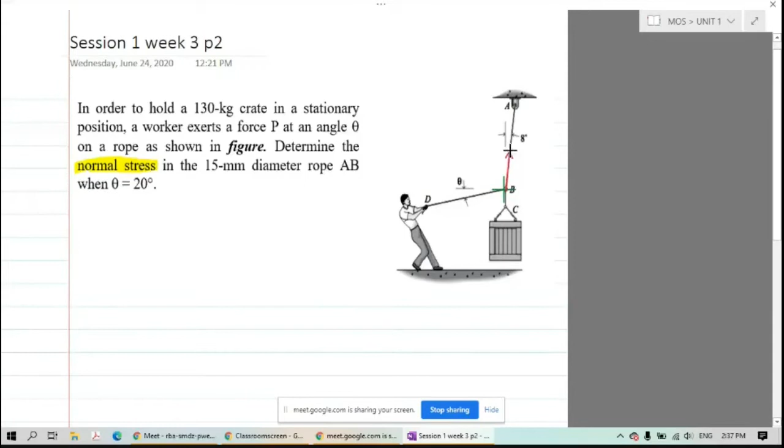For this, let us consider, so I'll put a small plus sign here. This sign indicates how the force will be acting. So if I consider a force here, one force will be like this, another will be like this, and the third one will be like this. Okay, so you have three forces. You have to identify what those forces are, and find out their values.

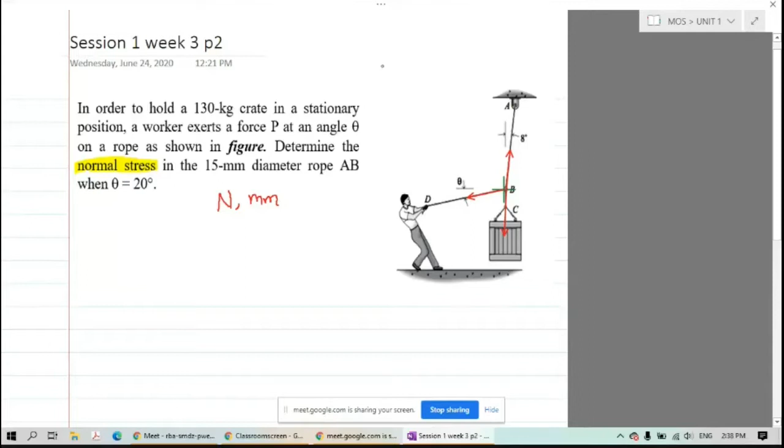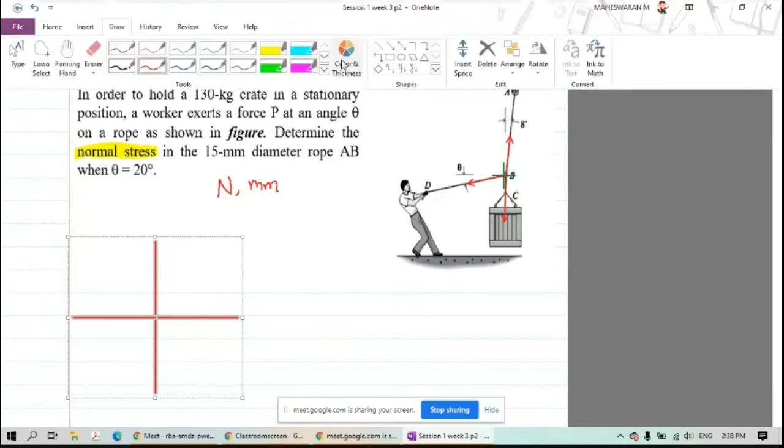So again, for this problem also, I am going to use Newton and mm to solve this problem, right? I'll draw a free body diagram. As in engineering mechanics, we are going to follow the same. I'm going to put a plus sign here. So you have forces. Let me consider you have a force here. You have another force acting like this. And a third force vertically downward, right? So these are the three forces you are having.

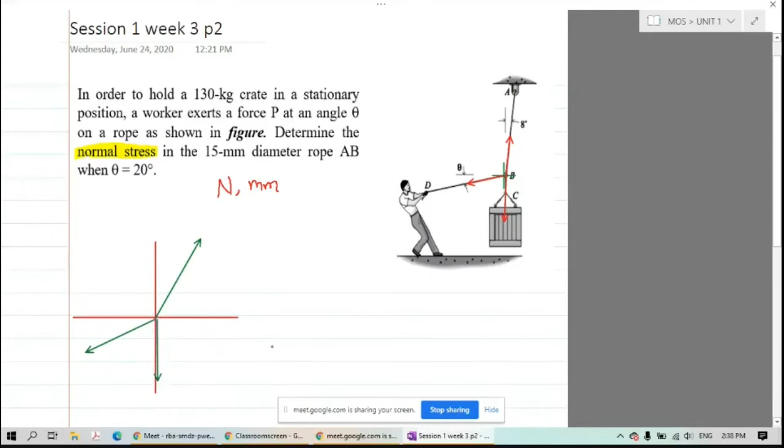Now I'm going to identify the forces, that is tension. So you can see here, this one will be TBA. We call this TBA, tension along the rope B to A. And this one is TBD, tension along the rope B to D. And this is weight. Weight is 130. So can you tell me 130 into 9.81? What is the value? 1275.3 Newton. Very good. Thank you.

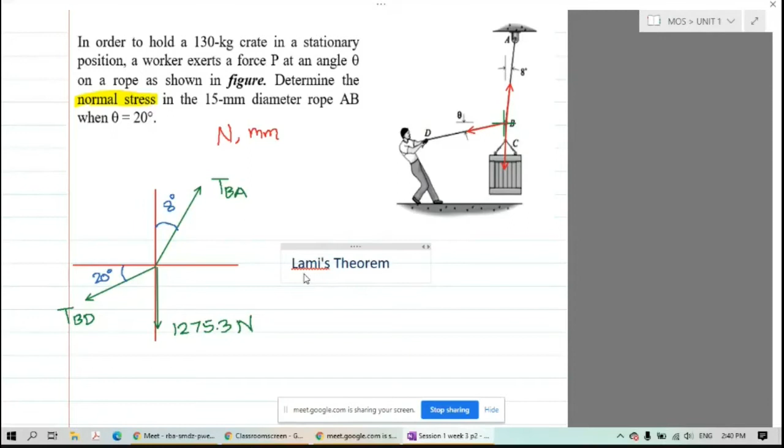So these are my forces. And if I consider the angle, this angle is 8 degrees. And theta is given as 20 degrees. So we have to identify their values. You have three forces. So what will we use here? Can anyone guess? Three forces. So we go for Lami's theorem. According to Lami's theorem, we know the formula.

What is that formula? Force by sine of the opposite angle, so TBA divided by sine of the opposite angle. What is my opposite for this? This angle, right? This is the angle opposite to the force, between the other two forces. In total it is 90. 90, 20 has gone, remaining will be 70. So this will be sine 70, is equal to TBD by sine of its opposite.

What are my opposite angles? My opposite angles are here, this one and this one, right? This one is 82 degrees, plus 90 degrees. So what is the total? 172. So the total is 172 degrees, right?

So the next one is 1275.3 divided by sine of its opposite angle. My opposite angle is 20 plus 90 plus 8. So 28 plus 90, how much will it be? 118 degrees. So this is what we are going to use. But my aim is not to identify all the forces. It is not engineering mechanics.

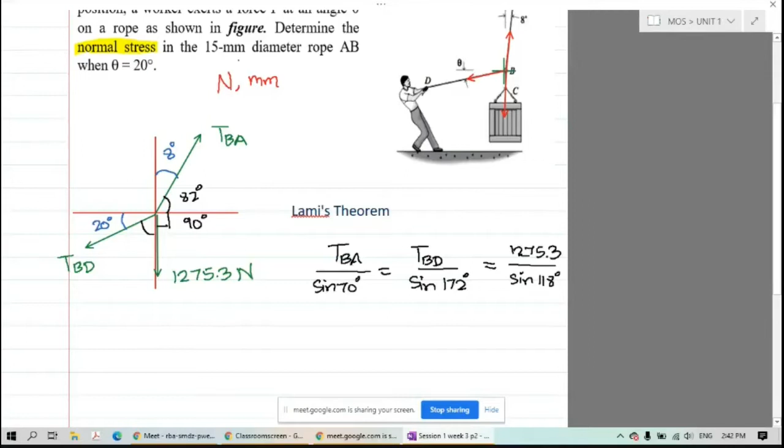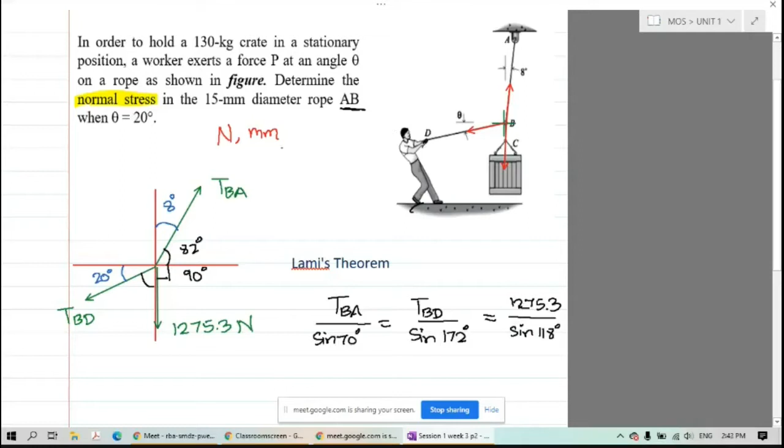My aim is to identify the stress developed in rope AB alone. Which means I have to concentrate on identifying the value for AB alone. So don't consider BD and all, that is not required, right? We have just drawn it for calculation and understanding, but our aim is to find only AB. So my equation will be TBA divided by sine 70 is equal to 1275.3 divided by sine 118 degrees.

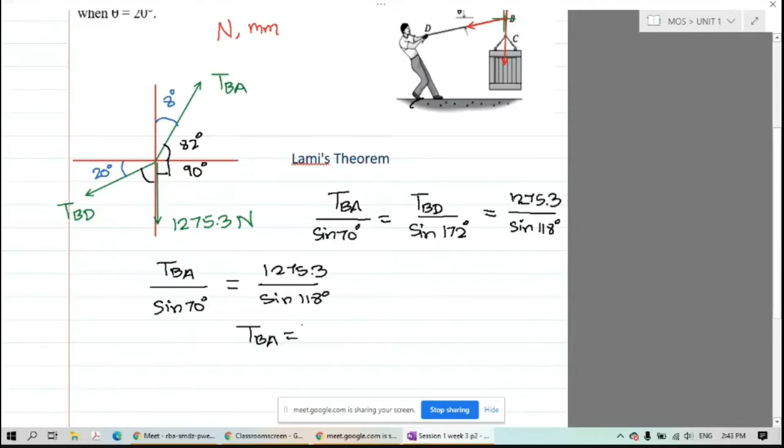So I'm not going to use the other part. Let us identify my tension, right? What is my TBA? TBA will be 1275.3 divided by sine 118 degrees into sine 70. So what is my TBA? 1357.2 Newton, right? Very good. Thank you. So now we have identified my force.

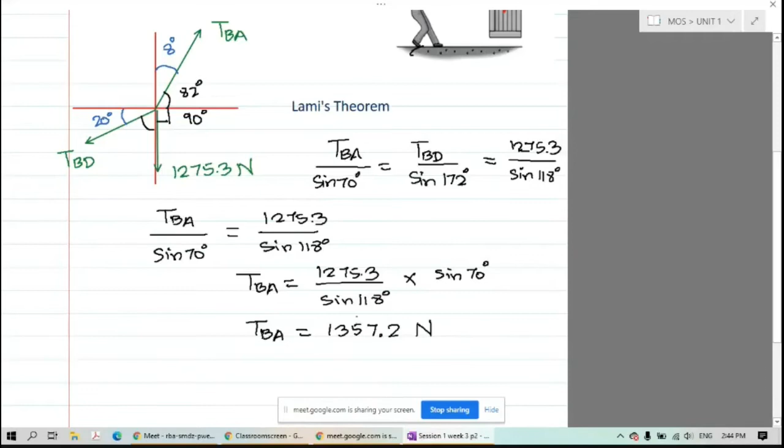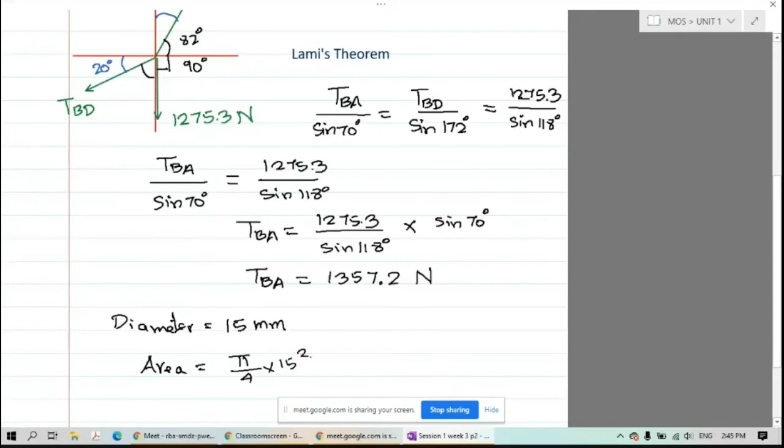Force is identified. For the formula I need stress, and you know the diameter of my rope. The diameter is given, it is 15 mm, right? Which means my area is pi by 4 into 15 squared. So we have to identify the cross-sectional area.

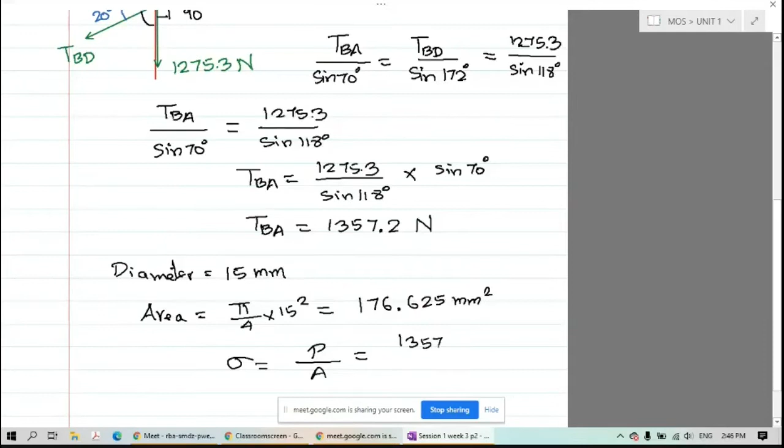176.625 mm square, right? So we identify what is my force and what is my cross section area. So the next step is my stress. Stress is force by area. So P, what you indicate here is TBA, right? Don't get confused. So which is equal to 1357.2 divided by 176.62. So 7.68 Newton per mm square.

So let me consider you have a handbrake shown in the figure. So you are applying a force, actually a uniform load, which is converted as a single point load. But it is around 70 Newton, right? So when you apply a force of 70 Newton, there will be a tension which is produced on your brake wire. So the question is, what will be the stress and what will be the strain on the particular brake wire?

So they also mention a few data. They mention what is the length of your brake wire or brake cable, what is the cross section area, and what will be the elongation after you apply a brake. First, we will consider the given data. So you have force P, which is 70 Newton. And they also give the length of your brake cable. So length L is around 460 mm.

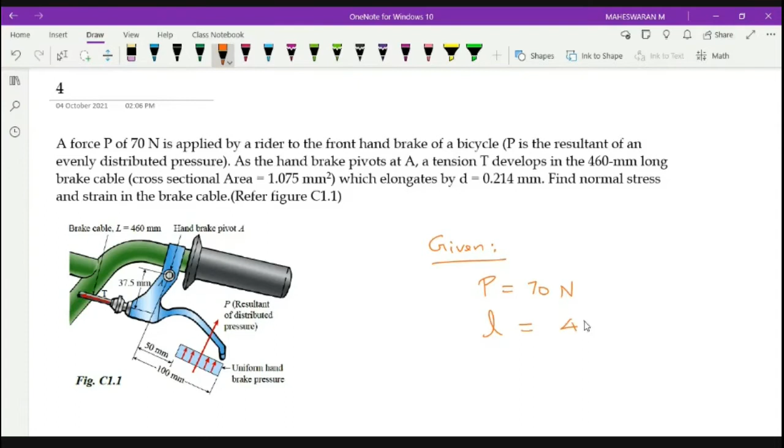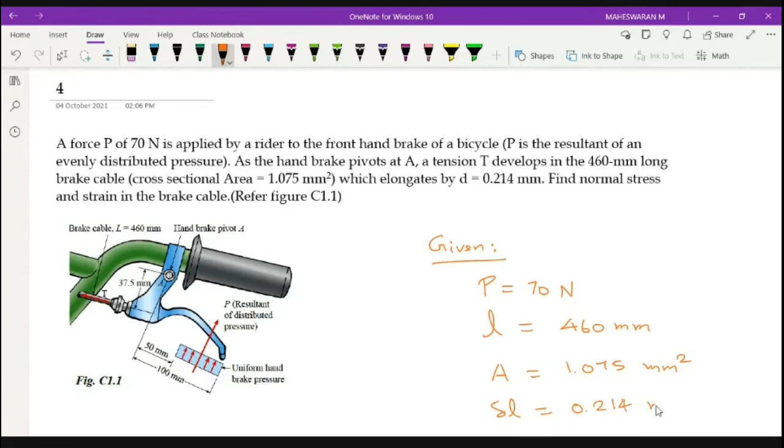Then cross section area. So cross section area A is equal to 1.075 mm square. And the elongation. So after you apply brake, there will be a small elongation, del L, which is mentioned as 0.214 mm. So they are asking two things: what is your stress and what is your strain?

So the first step is let us identify strain, because we know all the data related to strain. Strain is change in length by original length. Change in length is directly given, which is 0.214, divided by original length, the length of the cable, which is 460 mm. So if you substitute these values, 0.214 divided by 460 gives 4.65 into 10 power minus 4. Very good. So we got this as a strain, right?

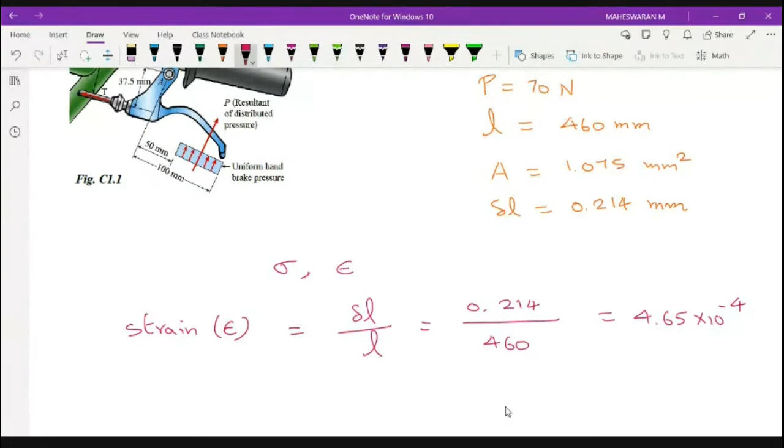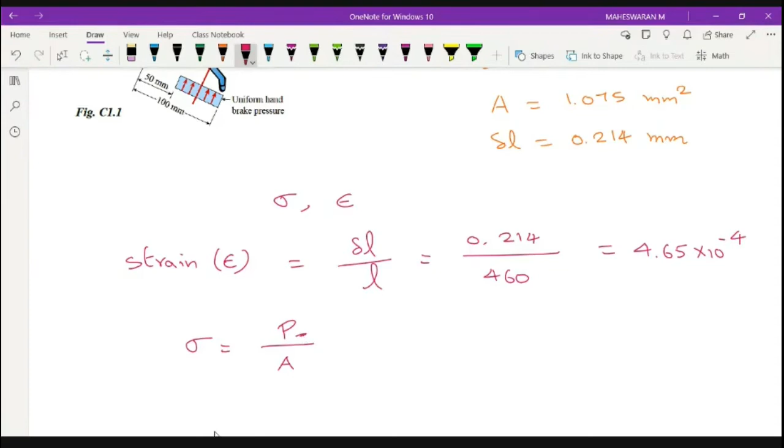So the next step is I have to identify what is the stress. To identify stress, my formula is force by cross-sectional area. I know cross-sectional area, which is 1.075, but I have to identify what is my force. So that deals with this picture. Consider this as an engineering mechanics problem. We have to identify what is the tension T, which is acting here.

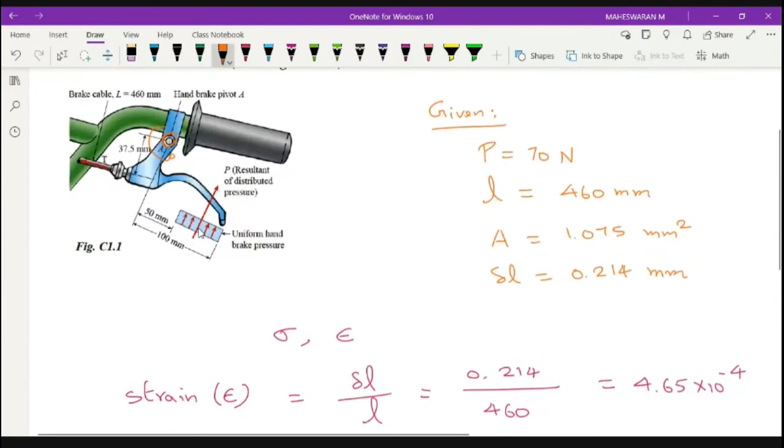So when you apply a force, you can see that this point A will have rotation, which is moment. So in order to avoid moment, you will have a reaction force. So let me say moment at A is equal to 0. You know the formula for moment: moment is force into perpendicular distance.

So what are the forces you have? You have two forces. One is P, which is here. This is my force P, and the perpendicular distance with respect to that: this is 100, this is 50, so the remaining will be 50, and at the center this is 25. So the perpendicular distance from point A to your force is 50 plus 25, 75. It is rotating in anti-clockwise. So P into 75, force into perpendicular distance.

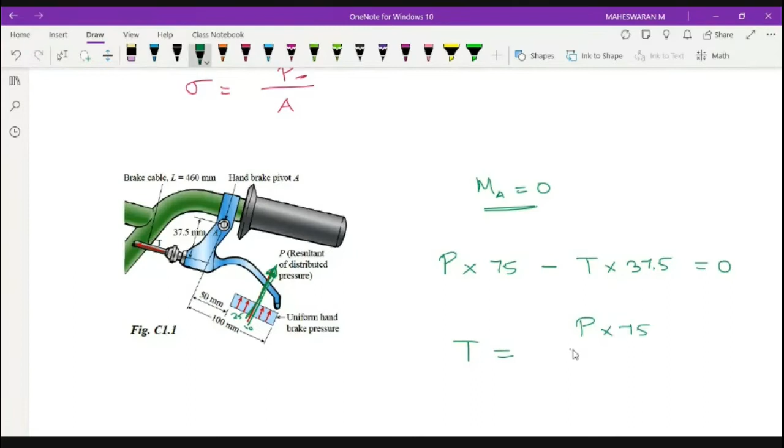Similarly, let me consider this one. This is rotating in clockwise. This is my T force, the tension. This tension has a perpendicular distance of 37.5, which is minus T into 37.5. Why negative? Because it is rotating in clockwise. So this is equal to 0. My aim is to identify T. So T is equal to P into 75 divided by 37.5. So what is the value of P?

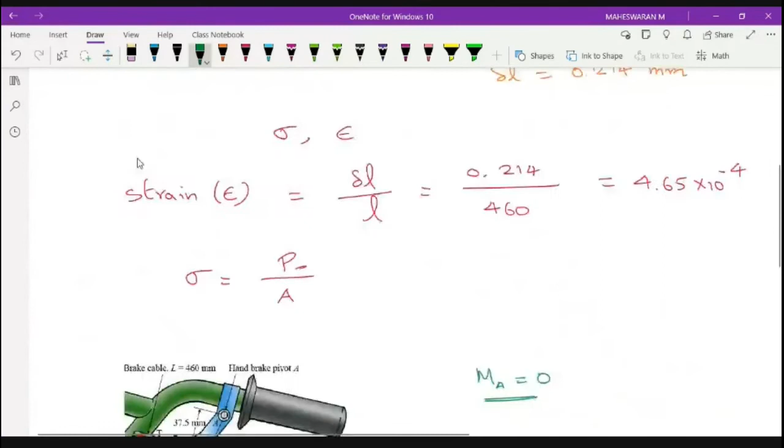So P is already given. So T is equal to P. So overall force P is 70. So T is equal to 70 into 75 divided by 37.5. What is the value of T? Your T is 140 Newton.

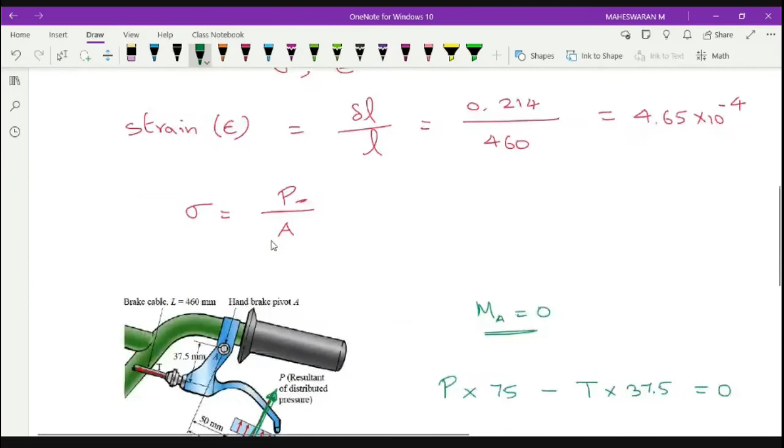So now your T is nothing but your force in this case, right? So let me take this thing again, this is my value which I am going to put here. So my stress is equal to force, which is 140 divided by cross section area.

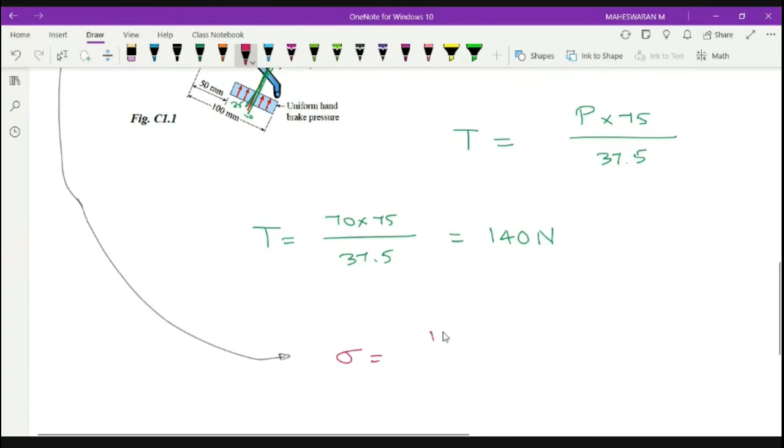What is my cross section area? 1.075. So this is stress: 140 divided by 1.075. So you are getting around 130.23 Newton per mm square.

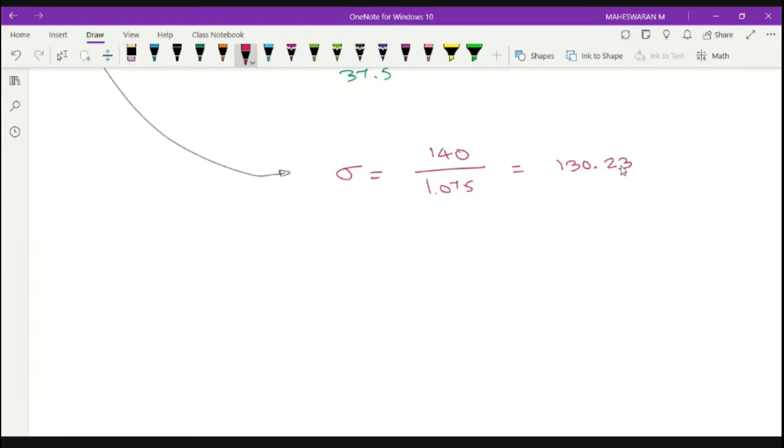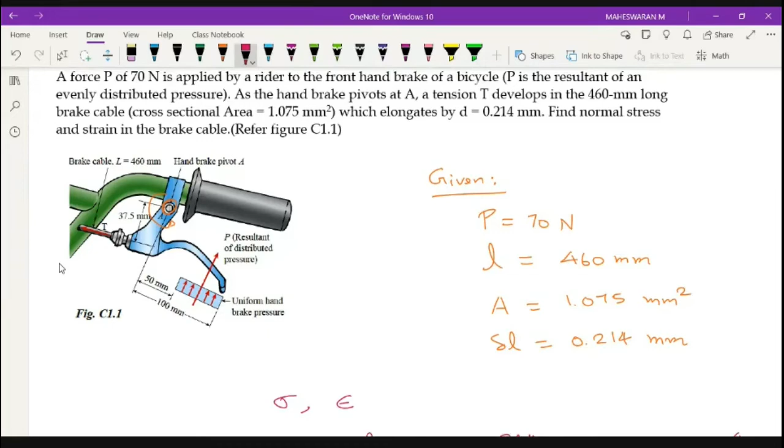Why we are identifying the stress? What is the purpose? What is the necessity of identifying the stress in the cable? So this cable may be a particular material. Let me consider it is having a mild steel, or some material, so let me call this as a mild steel.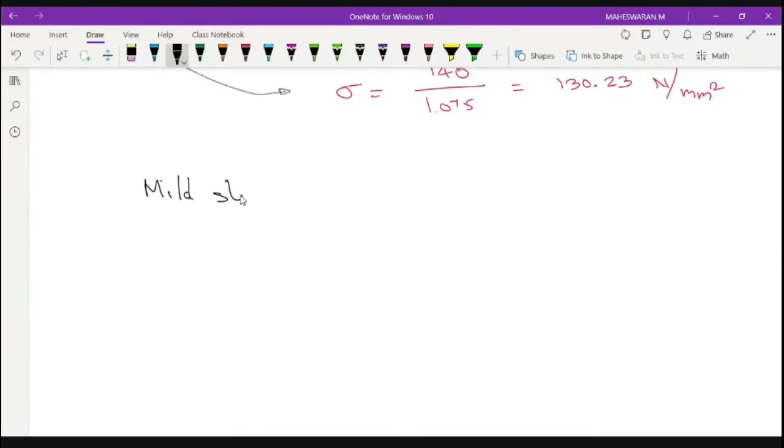So your cable is mild steel. So the mild steel, what is the yield strength, which is the maximum strength still elongation, still avoiding the elasticity. So up to elasticity limit is yield strength. So your yield strength, let me consider, it will be around 1 into 10 power 5 Newton per millimeter square. This is my yield strength.

Usually it is around 1 or 2, so it relates on particular value. Other than this, this is the maximum value, which means your stress should not exceed this 1 into 10 power 5. But what we have is very, very less, it is 130. Only if it crosses this 1 into 10 power 5 will your brake cable fail. So in this particular case, it won't fail, it will withstand.

But there are some other cases like fatigue failure. If I consider fatigue failure, I have to divide it by 8 or 10, I have to reduce it a lot. So what is fatigue? Fatigue is you are applying and releasing the load again and again. It's a continuous process. So brake, what we'll do, at least in a month will be applied around 1000 or

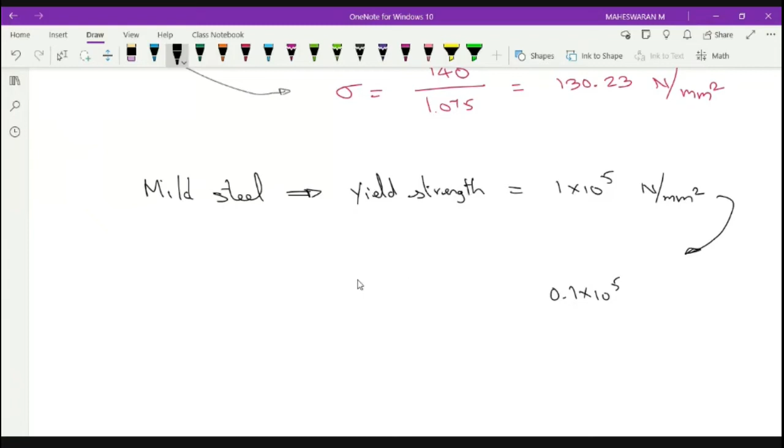So we are not considering what is the environmental condition. In cold season it will be different, hot season it will be different. We are not considering how much force you are applying, whether it is an impact force or a gradual load. When you apply a brake, you can apply it suddenly or gradually, so this also has a major cost. Then what is the amount of time you are applying it? So all these things come into picture, so it is always related to that.

So that is the purpose of this stress. This is also another problem, you can see here. You have a car, a winch car, something like that, which is around 130 kilonewton. So when it is fully loaded and slowly connected to a cable, it is moving towards upward direction. The angle is given, which is 30 degree, and the cross section of the cable is also given, it is around 490 square. The question is, they are asking what will be the tensile stress in the cable. It's a combination of your mechanics problem and your strength of materials problem, something related to that.

First, what do I do? I have to draw a free body diagram, it is similar to your engineering mechanics, as I told you. So this is my winch, my winch is like this.

Okay, this winch is having a cable tensile force T at 30 degree, weight W, which is acting downwards, right? Weight is around 130 kilonewton. And you have two wheels, right? So one wheel and two wheels.

So you know that your reaction of this wheel will be always perpendicular to your connection, so which means here you have one reaction, here also you have one reaction. We consider R1 and R2. And this two is also at an angle of 30 degree, right? This is my free body diagram.

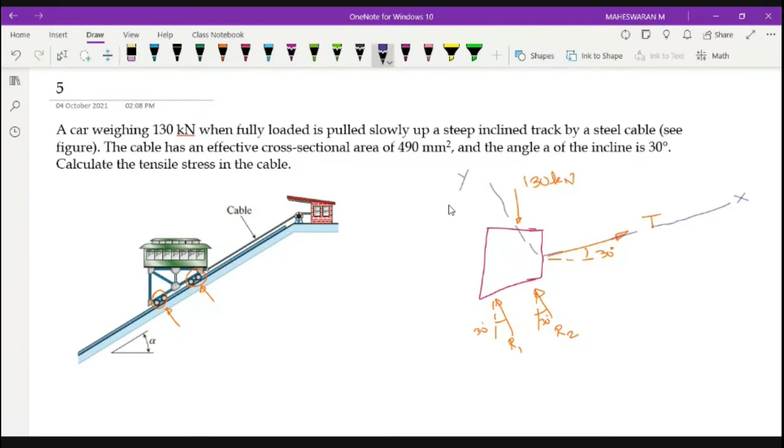Okay, so to solve this easily, what I can do, I have to change my X and Y axes, right? So what I can do, I can consider this as my X axis and perpendicular to that as my Y axis. Okay, so what happens when you do it like that? So you can easily locate. So you have only 130 kilonewton as an inclined force. Others will be straight forces. So in that case, let me draw how the diagram will be.

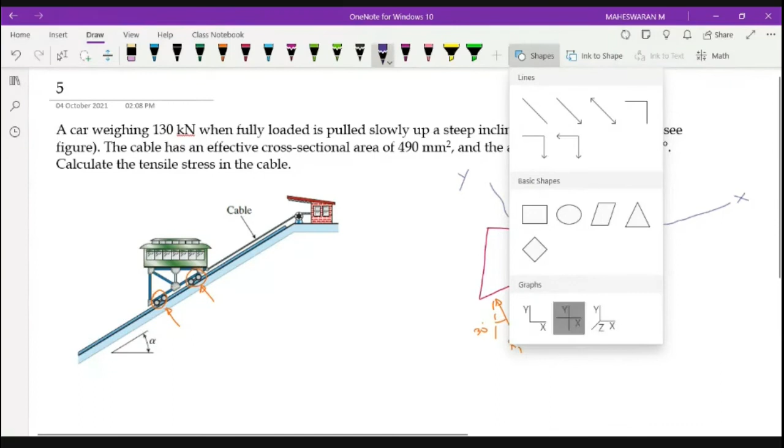So let me put a plus sign here, right? So what will happen? Your T is along x-axis. So this is my T, right? This is along x-axis T.

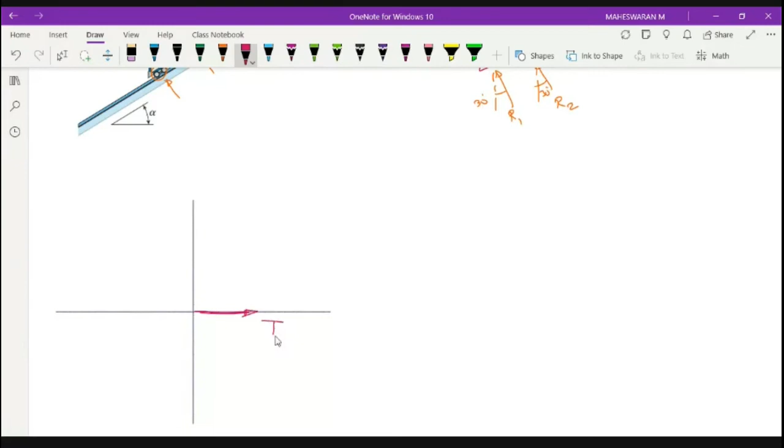Next, 130. So look at 130. So how it is? So which quadrant is your 130? Can you tell me which quadrant is your 130? So it is at the third quadrant. This is at the third quadrant. This is my 130, okay, this 130 kilonewton. Angle is vertical, so which means this is 30 degree.

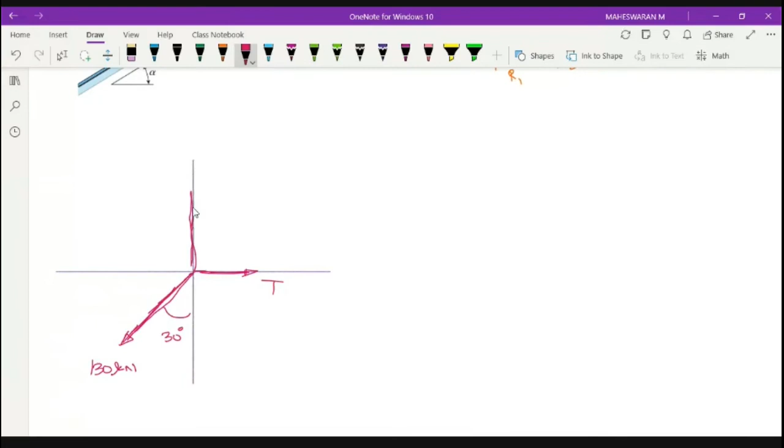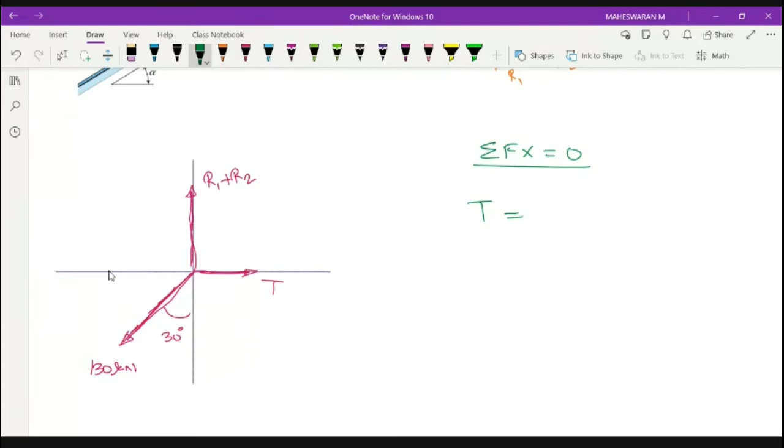Okay, to identify tension value, I can directly go for sigma fx is equal to 0. We put sigma fx is equal to 0, which means T is equal to 130. So when you bring it on this side, it will be sine 30, right? So 130 sine 30, so 130 into 10 power 3, converting this kilonewton into sine 30, right? So what you'll get? So what is my value of T? 65, so 65 into 10 power 3 Newton.

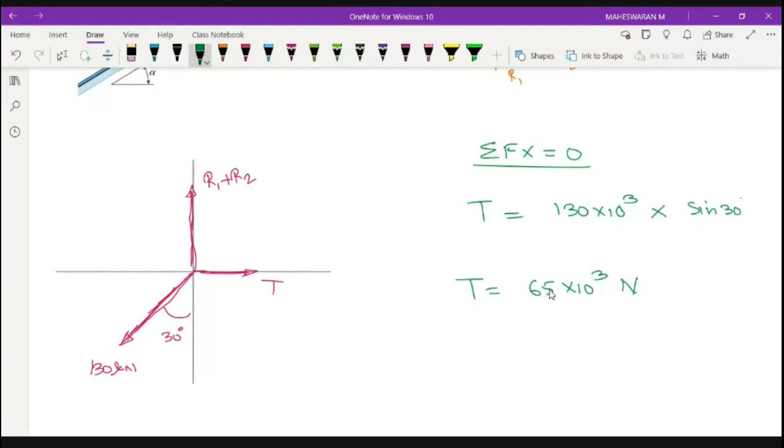This is my tensile force. Other things no need to worry. So I got my tensile force, right? So tension. So now we can identify what is the stress. Stress is force by area. Area is 490, which is given. So we can identify the stress.

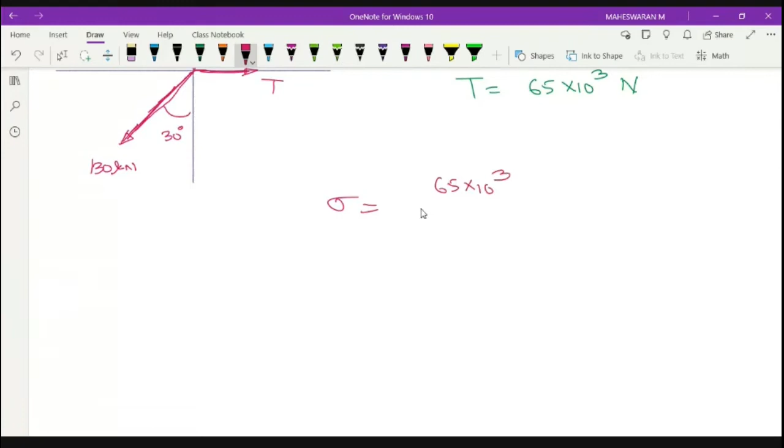Stress is equal to 65 into 10 power 3 divided by area. So what is my area? Area is 490 mm square. So what is the value of my stress? We are getting 132.65 Newton per mm square.

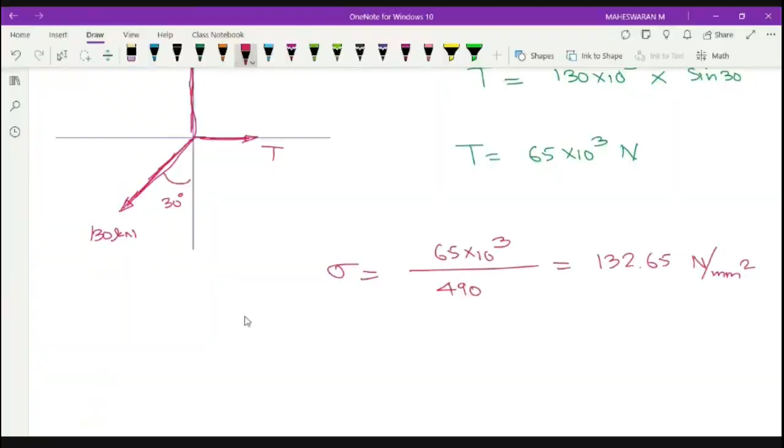Any doubt on this? This is a problem which is having you have two different types of shoes. So one man is wearing a shoe, another one, a woman is wearing a heel shoe. So you have to identify which is having more stress. So that's what the statement is. So I don't want to explain the full statement, it is clear. So the weight of a man and woman both are 80 kg, let me consider. In that case, you have to identify what is the stress developed in the shoe and who will have more pain in their leg.

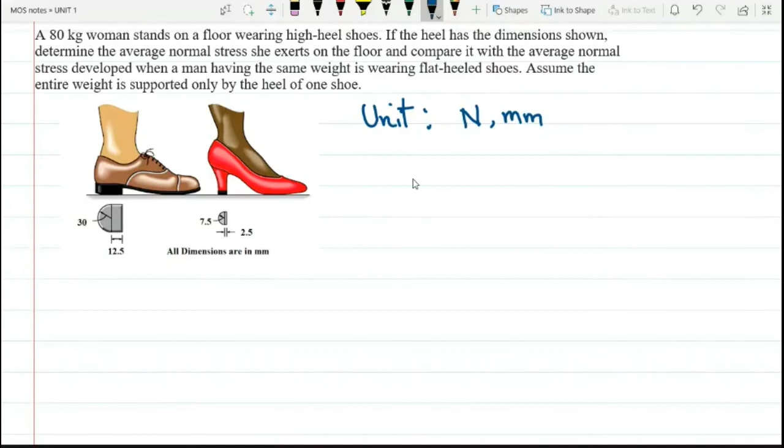First step is I'm going to use particular unit for this. So unit is very, very important. So my unit for solving this problem is Newton and mm. So I use Newton as my unit, so for any forces, I will convert it to Newton. The other one is for distances, I will use mm. So now, what are my given data?

So my given data, you have only a diagram related to different types of shoes, all measurements in mm. Another given data is the weight, which is 80 kilogram. So my given data is W, which is equal to 80 into 9.81.

So that will give you your value. What will be the value? 784.8 Newton. Okay, good. Thank you.

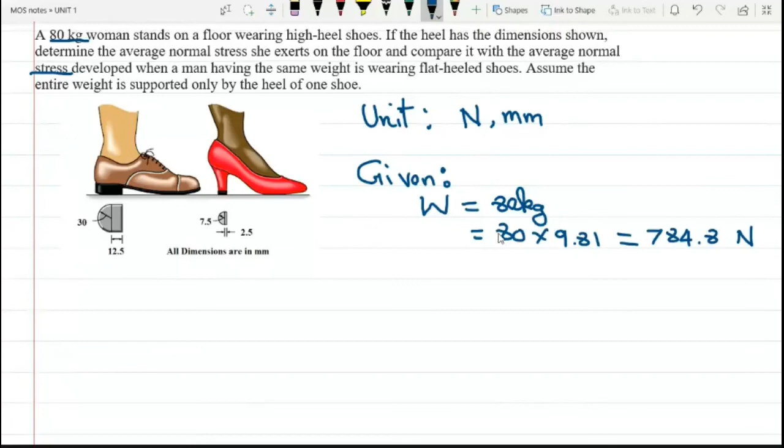So we identified what is our W, that is my force. So we know the force. Only thing is I have to identify what is the area. So our aim is to identify only the stress value developed. In that case, force by cross-sectional area will be my stress. We can directly identify it, so we will solve one by one.

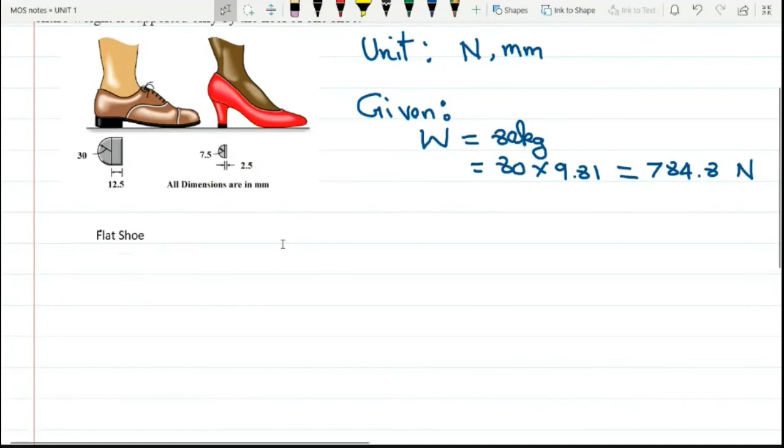First, let me go for the flat shoe, which is a man's shoe. So this is my cross section, having 12.5 as the width here. And this is the radius, so radius is 30.

So what will be the total distance? It's like a diameter, right? One radius plus one more, which is 60. So this will be 60. And of course this is the radius, which is 30. So R is 30 here.

So now I will consider this as two parts, section 1 and section 2. I want to identify the area for each section separately and add it, that will be my total area. Area for section 1: it's a rectangle, which is 12.5 into 60. So total, it will be 750 mm square.

Next, I am going to identify the area for section 2. It is a semicircle. If it is a semicircle, you know that it is pi r square by 2. R is 30, so 30 square. So the answer is 450 pi mm square.

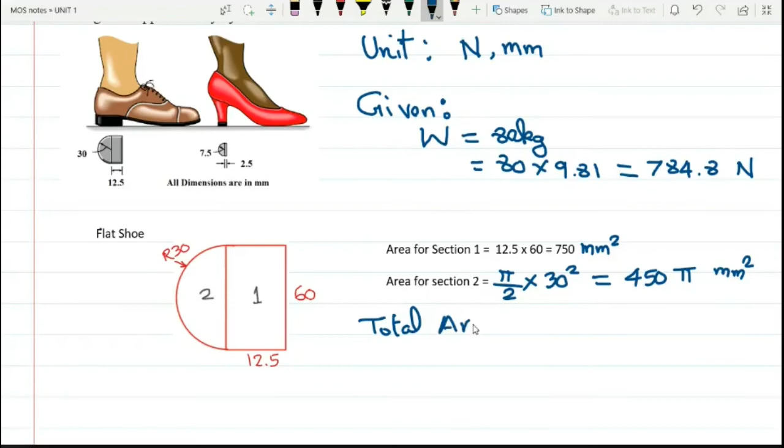So total area is the addition of these two, which is 750 plus 450 into 3.14, giving pi. So what will be the total area? 2163 mm square.

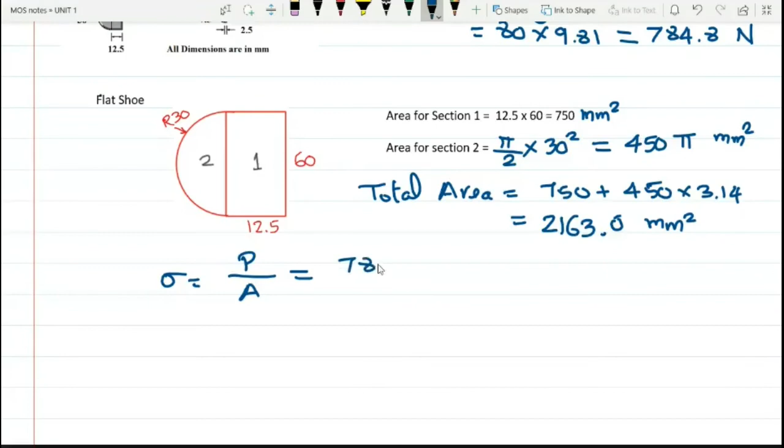So now we identified the total area here. Only thing is I have to identify stress. Stress is force by area, so force is 784.8 divided by area, which is 2163. So what will be my stress value? 0.36 Newton per mm square. This is my answer for my first flat shoe.

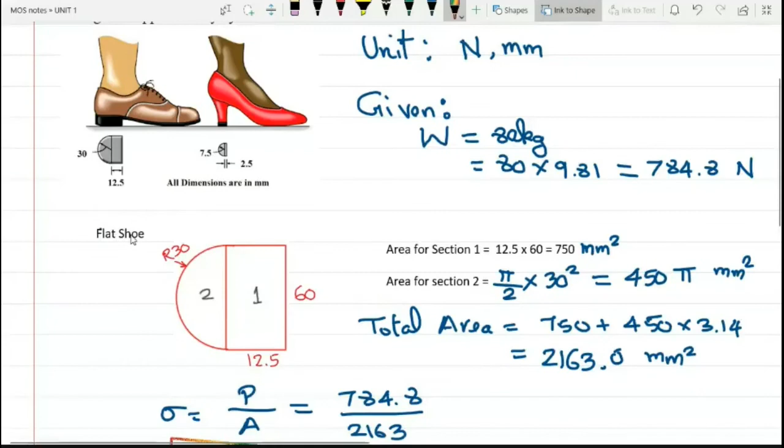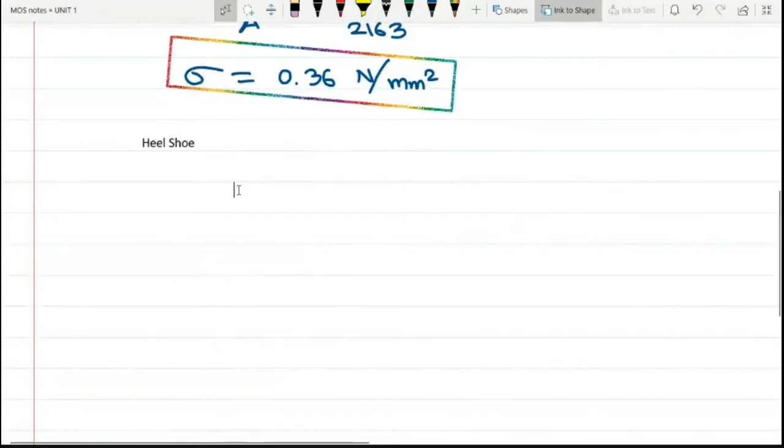Let me go for the next one, which is heel shoe. So the procedure is same, there is no much difference. Again the cross section is similar, but the values are somewhat different. This is 2.5, this is 7.5 into 2, so which will be 15. So there's no much difference here, again we are going to use the same procedure.

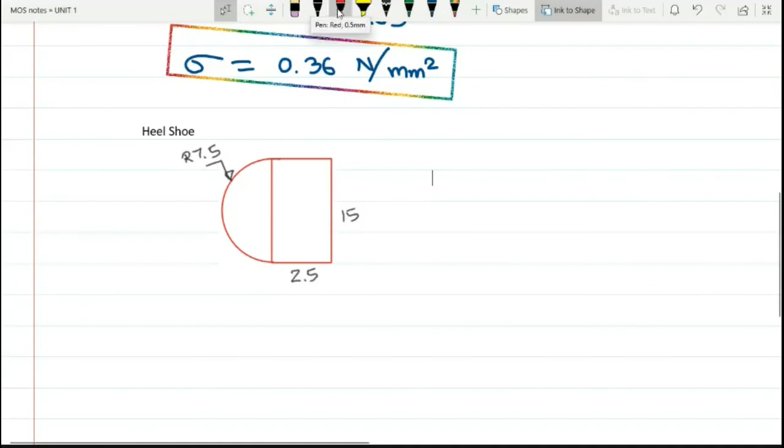I'm going to consider this one as section 1 and this one as section 2. Area of section 1 is equal to 2.5 into 15. Can you tell me what is the area for this? 37.5 mm square.

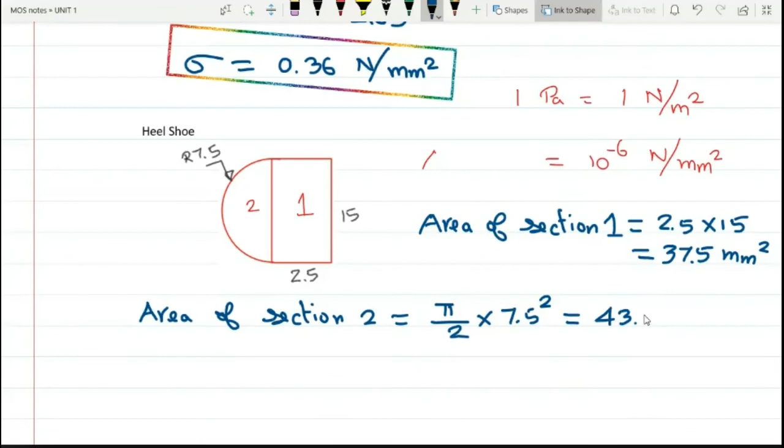Next I want to identify the area for section 2. So this is again a radius, pi by 2 into 7.5 square, which gives 43.8 mm square. So I'll identify total area: 37.5 plus 43.8. Can anyone tell me the answer? 81.3 mm square.

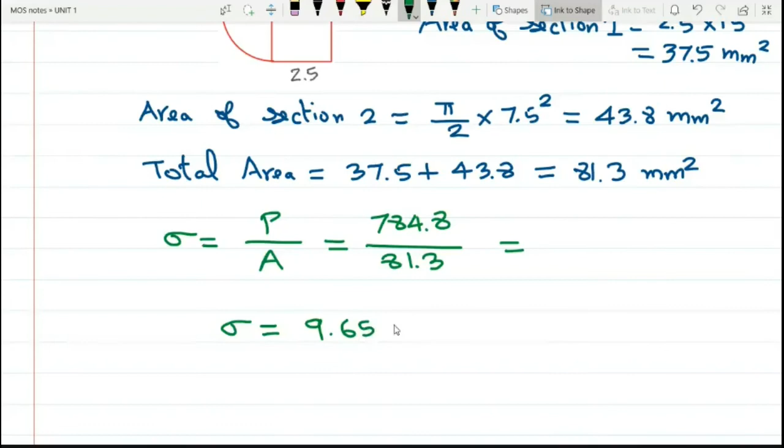So the next step is similar to what we discussed. We'll go for stress, stress is force by area. My force is 784.8 divided by cross section area 81.3. So what is the answer? 9.65 Newton per mm square.

Area of cross section, section 2, is 88.31 mm square. This also changes, so this is also 88.31. Total area becomes 125.81 mm square. So what is the answer here? 6.23 Newton per mm square.

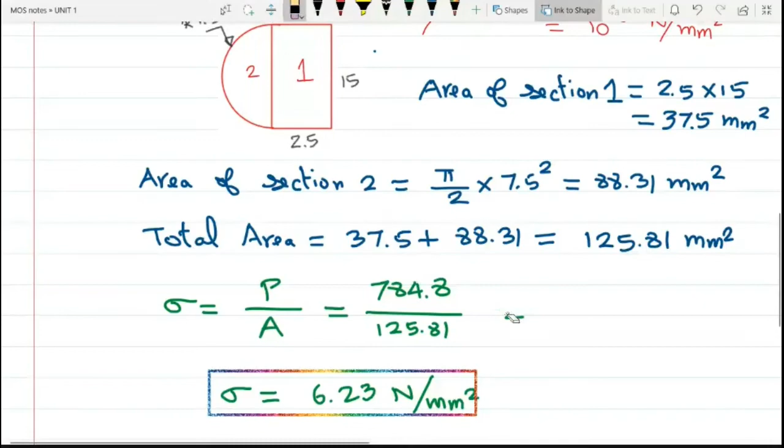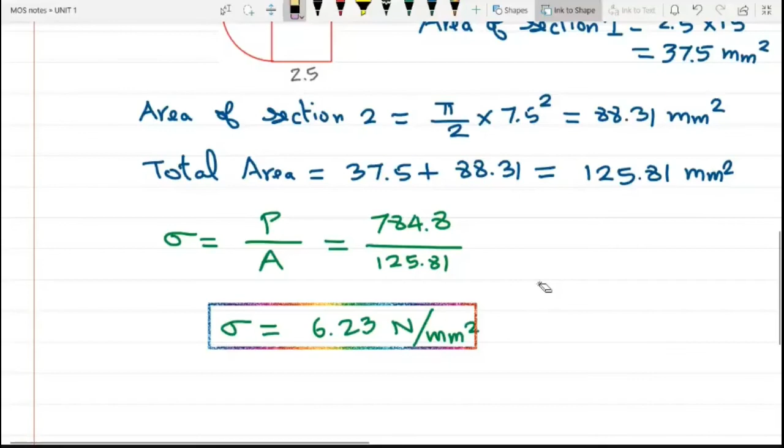So now we got the values here. For flat shoe, it is 0.36. For a heel shoe, it is 6.23. So what do you prefer from this? Stress is higher in heel shoe, which means there will be lots of pain when you wear a heel shoe.

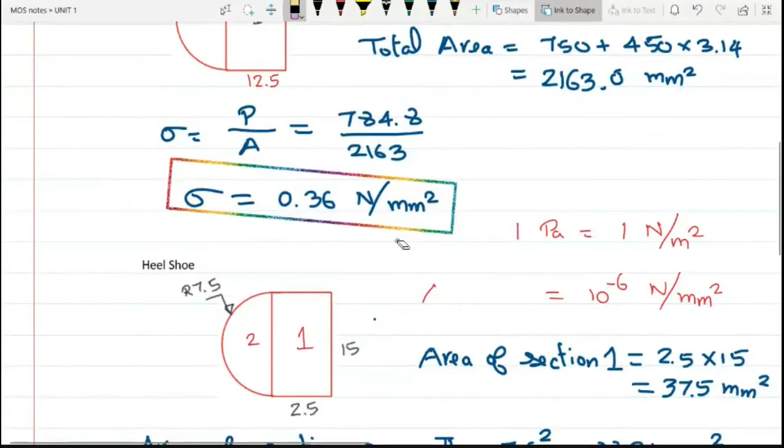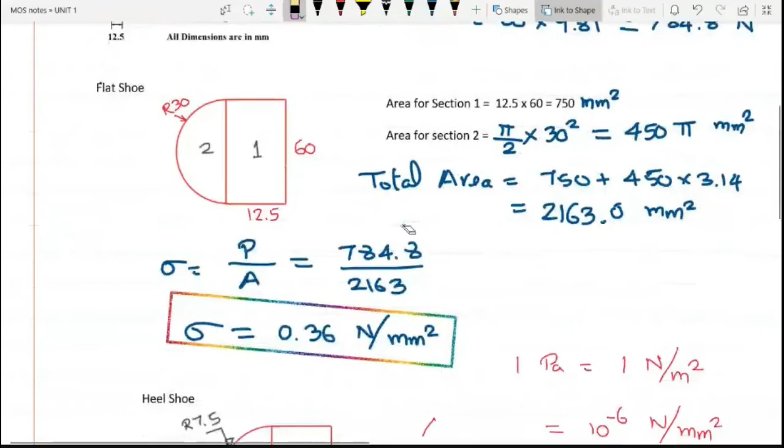Because the stress is higher, while you wear it, that stress can also affect your leg. It causes some pain, that is one thing. Another thing, there is a possibility of easy breakage for this heel shoe.